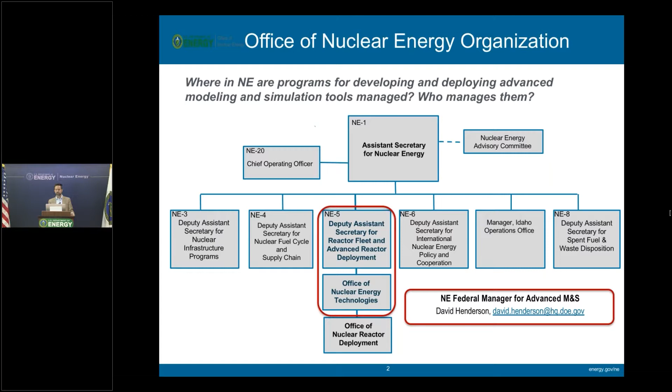So historically, and to the present, our modeling and simulation programs, there are two. One is the Energy Innovation Hub for modeling and simulation. You also hear that referred to as CASL. That's the consortium that runs that hub for the department. This was and is a program focused on light water reactor technologies. Then we also have the Nuclear Energy Advanced Modeling and Simulation program. That program has been focused on non-light water reactor technologies. So when I refer to advanced reactors, I'm typically referring to non-light water reactor technologies.

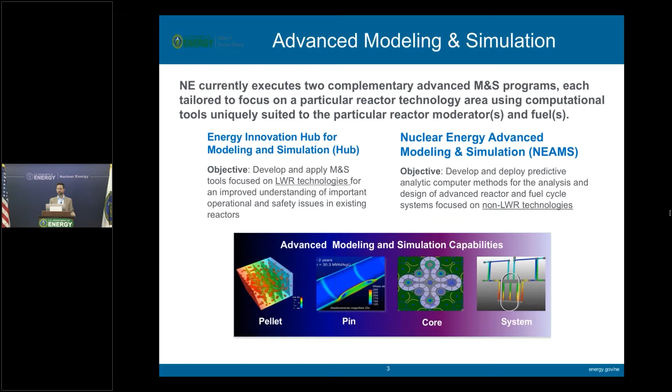I say that these programs have historically been separate because starting this next year in 2020, the hub program will go away. It's received what we expect to be its last year of funding in 2019. That will carry into 2020 when the 10-year period for the hub is to end in June of 2020. In preparation for that, we've been working for quite some time to look at the light water reactor scopes of work for modeling and simulation that really need to continue into the future. And so the two teams have worked well to identify that scope and fold it into the single program going forward, Nuclear Energy Advanced Modeling and Simulation. But that program in the future will include light water and non-light water reactor work.

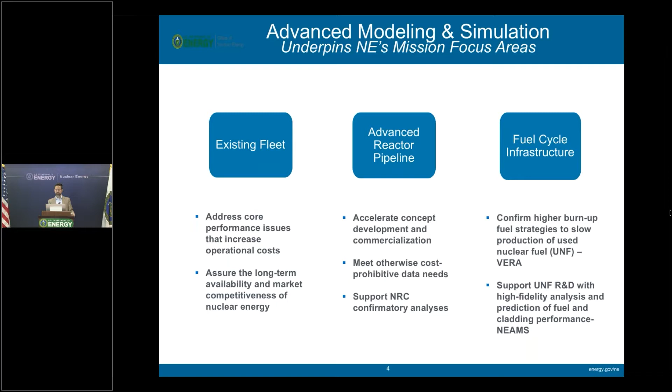So these are the three main areas of the Office of Nuclear Energy's mission that the modeling and simulation programs support: the existing fleet, advanced reactor pipeline, and fuel cycle infrastructure. And I'll go into at least the first two of these in more detail here next. So for the existing fleet, we're really looking at operational kinds of issues, ways that we can improve the operational performance, the economics, ultimately, of the existing fleet. So we're very interested in those problems that are of high interest to the industry, to utilities, to vendors especially. It focuses a lot on fuel and reactor core performance issues. You see some identified here, and solutions that we've been looking to address.

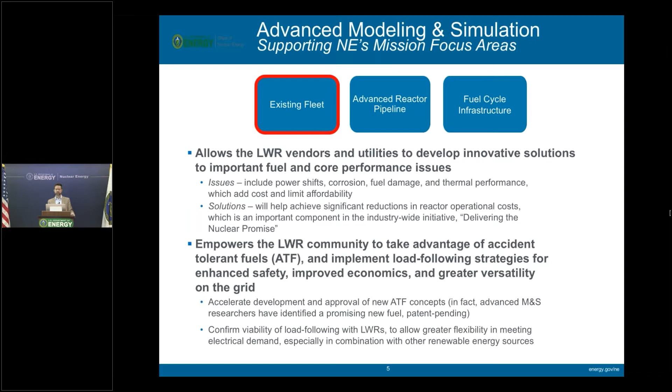We also have been working on accident tolerant fuels for quite some time. Both the advanced reactor NEAMS program and the hub have used the Bison modeling tool for fuel performance aspects. And so we will continue to do research in this area, especially in accident tolerant fuels. Some of these concepts are significantly different than the existing light water reactor fuel, and may need more modeling and simulation support, whereas for current fuels, the industry has very tried and true tools for licensing and performance kinds of issues. So we look to the industry to help guide us in where we should invest further there in the future.

On the advanced reactor side, we see a much larger role for advanced modeling and simulation. And when I say advanced modeling and simulation, I'm typically talking about multi-scale and multi-physics modeling. The reason being, there's much less infrastructure, both physical infrastructure and modeling and simulation history, to go on and to rely on as some of these advanced reactor technologies try to design, license, and ultimately build. So we see a critical role in accelerating the design and deployment of those reactors. In some cases, there are unique features of those reactors that if you were to use existing tools that are out there, you may not be able to examine in full detail all the aspects of your design, or as you go toward licensing, make use of the safety features of those designs. So we're really trying to reduce the time for licensing applications to the NRC and enhance the potential for successful commercialization.

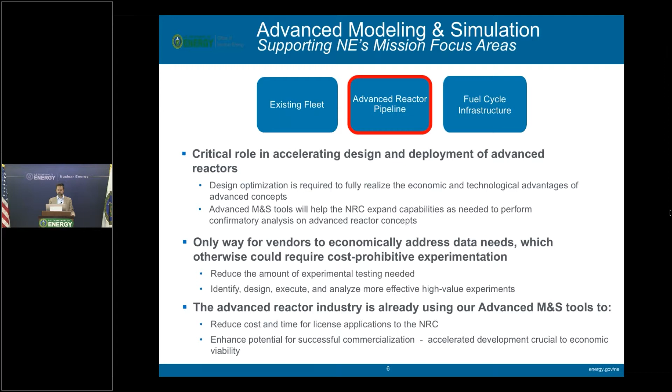I wanted to give a couple of examples, collections of modeling and simulation codes to really highlight for folks proposing. This is something that comes up quite frequently. We'd like to minimize the proliferation of additional codes and really try to focus work under these NEUP scopes into developing models that can be folded into these codes that already exist, or else we end up with too many animal names to even keep track of.

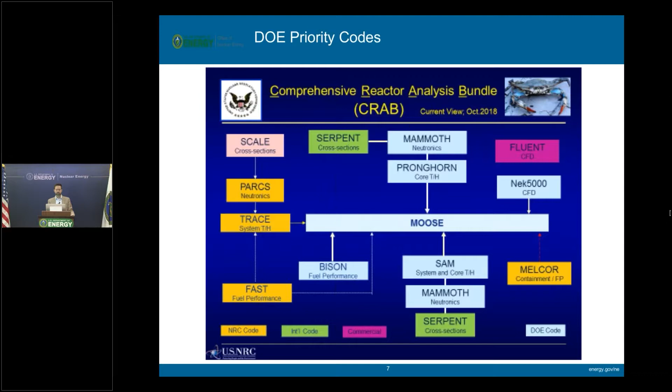Not all of these are fully developed. Obviously, that's a large part of what the program is working on, and we are prioritizing these codes because they're of high interest to the NRC, and they plan to use them. The ones in blue are the ones that we're actively developing within the nuclear energy modeling and simulation programs.

This is another list. This is not exclusive, but if you're proposing to use these codes or fold your models into these codes, that will definitely help us, as these are really the focus going forward, especially for advanced reactors. But some of them can be used for light water reactors as well.

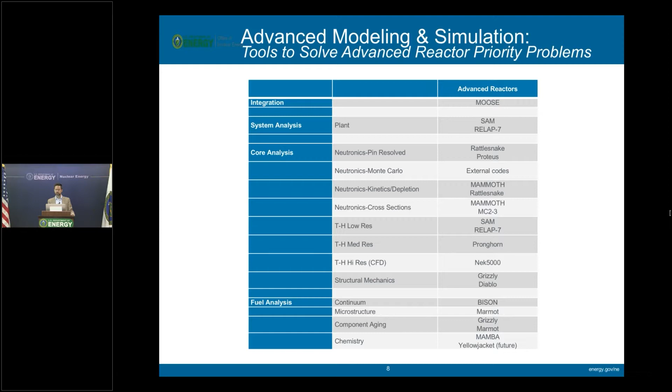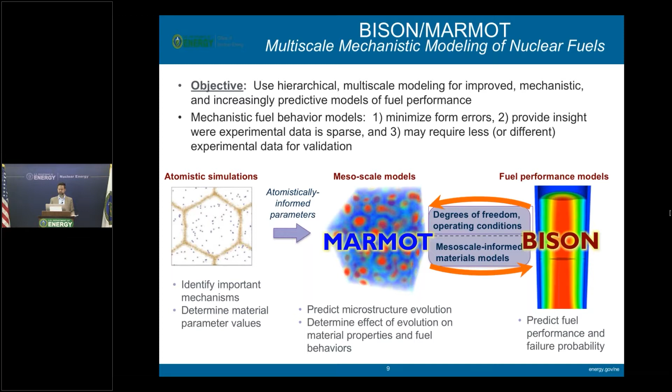So getting into the actual scopes in this CINR call. The first one is NEAMS-1, and this is seeking a generalized approach to multi-group cross sections. This is addressing the fact that to date, to run your core simulations, you'll need to generate multi-group cross-section libraries, but those are very specific to one particular point in time, one particular design, and if anything changes, those libraries may have to be regenerated anew. So we're really looking for a more flexible technique that doesn't require the regeneration of cross sections every time something changes. Think of inserting a plate or a baffle in a reactor, a generalized technique or methodology to be able to handle that on the fly.

At this point, I also wanted to note that as I go through these slides, these are not a complete rehash of what is in the scopes of work that are written in the call. So please pay attention to that. It's got much more detail. What I'm seeking to do here is highlight some specific things that we are looking to emphasize or avoid, as the case may be. I'll be folding these into any edits to the scope in the next week or so, where we may need to give some of this specificity.

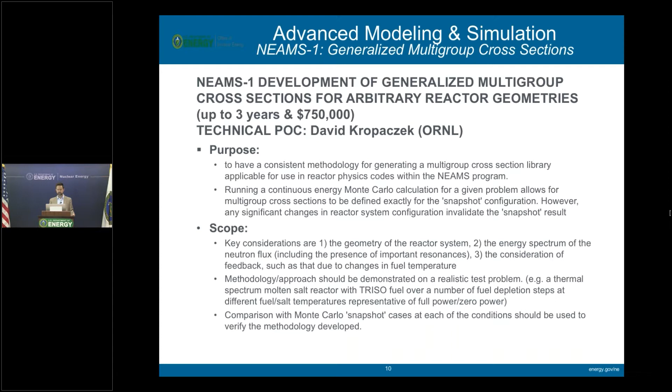So the second scope is NEAMS-2. This is near wall gas flow correlations in pebble beds. So this is the gas flow through the porous media. The approximation of that is central to the design and licensing of gas reactors. In particular, the flow near the wall and its interaction with the bypass flow is something that has not been modeled and validated at high resolution.

So really with this scope of work, we're looking for folks to develop a test to be able to model and capture the high resolution data for such gas flow near the wall. We're really looking for these experimental investigations to have high resolution and spatiotemporally resolved measurement techniques, so that we're getting really high quality data that we can use for these high fidelity simulations.

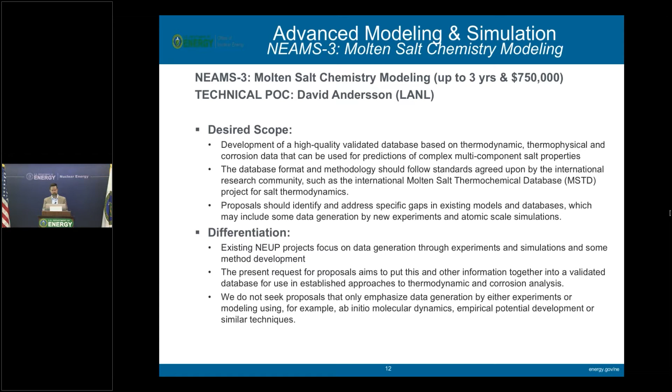Okay, so then we move into the MS-NEAMS area. We have, I believe, one scope of work in this area. This is on the SAM code, baseline development for that code. And there are two parts to this scope. One is multi-scale thermal fluid simulation. So we're looking for robust and accurate schemes for coupling the 1D system codes and 3D computational fluid dynamics codes at the fluid-to-fluid interface. There's a lot of loose coupling approaches in the literature. We're looking for more tightly coupled schemes.

This could also include the coupling schemes of conjugate heat transfer between 2D structure and 3D fluid flow. We are looking for direct comparison of existing or new data sets with simulations that use the NEAMS codes, specifically the SAM and Nek5000 codes. And we're not looking for pure CFD validation experiments, which we've done either in other scopes in the past or are doing elsewhere.

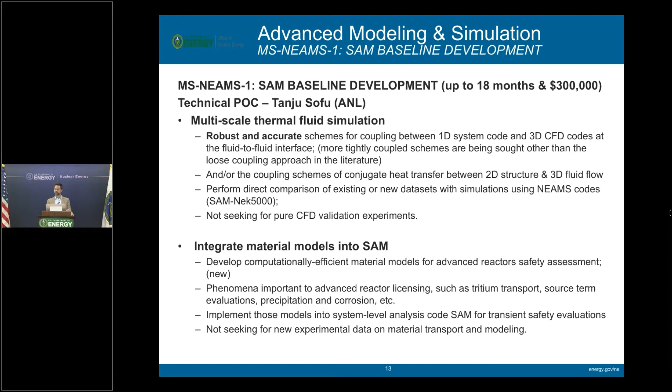The other part of this scope is to integrate material models into the SAM code. So developing computationally efficient material models for advanced reactors for use in safety assessment. Looking to integrate phenomena that are important to advanced reactor licensing, things like tritium transport, source term evaluation, and then looking for proposals that implement those models in the systems level code. We're not seeking new experimental data on material transport and modeling. So this is one of those instances where I'll put some of these specifics into the scope of work in the next edit, so do be watching for that.

All right, so as we get to the two IRP scopes that we have for modeling and simulation, I wanted to give a little bit of an overview of what we're trying to achieve here. This may or may not be different. It's at least different for us, but we really want to try to encourage university involvement in the program and the execution of the program at a more integrated level, more tightly coupled, involved in the discussions that we have about what the scope should be, what the areas of emphasis should be, and to help execute that as well.

So these are not highly specific scopes of work. We're really after identification of strong teams that can work in this area, but can also have the ability to adjust over these 3-year periods as the emphasis may change within the program. But we would be looking for the participants on these IRPs to really function as a part of the program, to be representing the program in meetings outside of our internal meetings, to be describing and defending the scope that the program is pursuing.

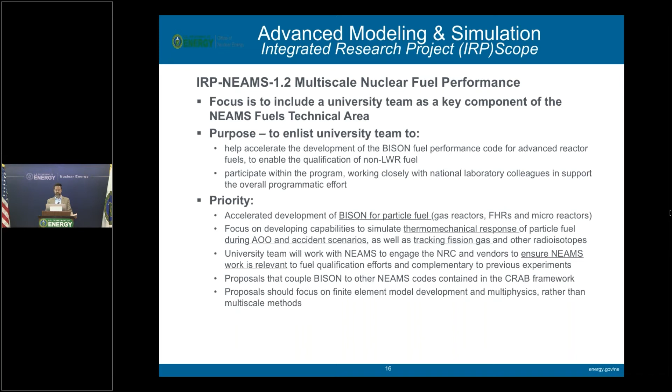This group would need to engage with not only the NEAMS program, but also NRC and the nuclear industry to make sure that the work that we're doing elsewhere in the program and the work that's being done under this scope is relevant to the industry. So this work done under this scope, while it should be focused on the BISON code and incorporating models into the BISON code, it should also be done with the intention to integrate the BISON code with our multi-physics approach that we have in the program, and that is also identified in that CRAB framework, which is the NRC slide I referred to earlier.

Okay, so those were the scopes that are more specific to the NEAMS program. These next two, while I am kind of the caretaker for this area, they're not specific to modeling and simulation, although that's where you'd use a lot of nuclear data and benchmark evaluations. But I am working with the other parts of the Office of Nuclear Energy as we receive proposals to make sure that the reactor type that one of these might be useful to is a priority for those areas. So we have two scopes in this area. The first one has to do with benchmarking. This is the MS-NE-1 scope.

So a little bit of background here on these two international benchmarks, the International Criticality Safety Benchmark Evaluation Project and the International Reactor Physics Evaluation Project. These are both OECD NEA international activities, long-running, focused on updating and publishing handbooks that support the characterization of reactor core methods, neutronics components, multiphysics measurements, validation of the nuclear data, and are useful in reactor and criticality safety. This has been a long-running scope, I think, for at least a couple of years previous, and continues into this year. So hopefully you're fairly familiar with these benchmark projects.

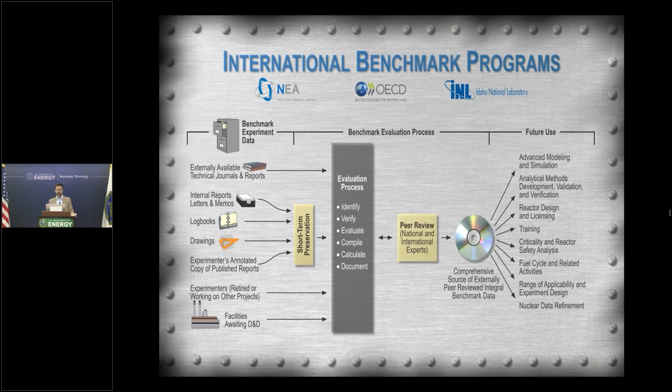I really want to encourage you to take a look at other projects that have been awarded, whether it's within the CINR framework or outside. Please make a case when you propose in both of these areas as to what the need or the gap is. Make it very clear what this benchmark, in the case of benchmarks, will be most helpful for, so we can really evaluate the impact that your proposal would bring.

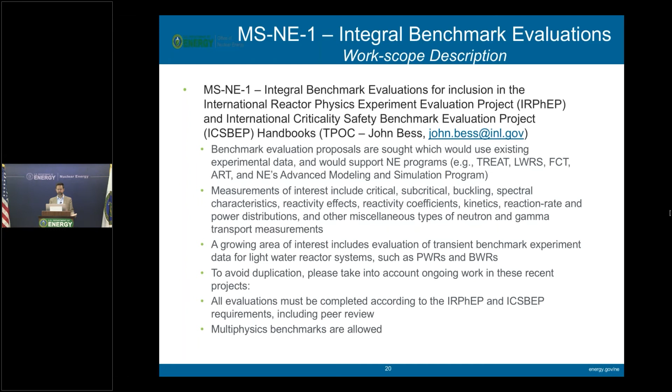The second scope area is nuclear data. So again, this is the same scope of work that we had last year. So please look at the awards that either have been or will be announced soon, as the case may be, within the CINR framework. But also there is an agency-wide activity that is run by the Office of Science, or led by the Office of Science. The Office of Nuclear Energy and NNSA also participate in those calls.

Their call includes both laboratories and universities. We only participate in the laboratory side of that call because we have this scope of work under the CINR. So here we've recognized over time that as libraries get updated, databases get updated, in improving some areas of that database, it may create problems in others. So also there are just in some areas uncertainties that are important for some of these advanced reactor concepts.

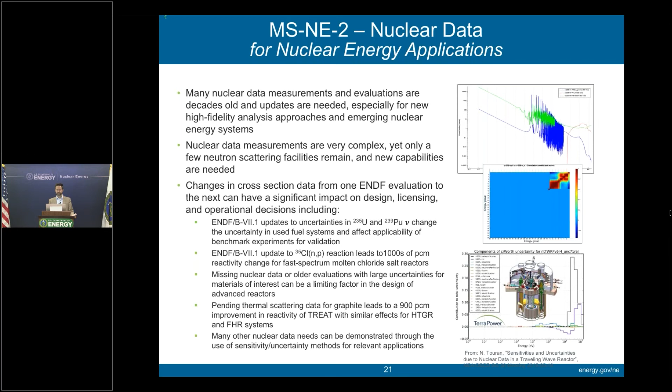And so as you propose work in this area, please identify what those gaps are clearly and what the impact on reactor operation or safety or licensing would be. So this is, as I said, the same scope of work as last year. When I put this scope out, I didn't have a technical point of contact listed here. That'll be Brad Rearden, who was also the technical point of contact last year. So just pay attention to what's already been awarded, and please highlight the impact of the nuclear data that you're looking to improve or supplement.

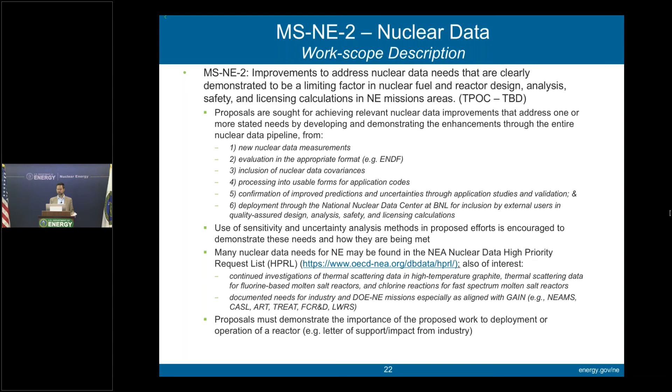There was something else I was going to say on this slide. Yesterday there was a scope of work under the MSR and reactor concepts. And so I wanted to clarify how this nuclear data work relates to the work under that scope. So here we're talking about actual generation or analysis and improvement of nuclear data. In that other scope of work under the reactor concepts area, that is looking at capability development or capability enhancement for nuclear data purposes. So that other scope is about capability. This scope is about the actual nuclear data. So I know a question came up on that yesterday, so I wanted to clarify that as well. So that is my last slide, and I'll be happy to take questions.

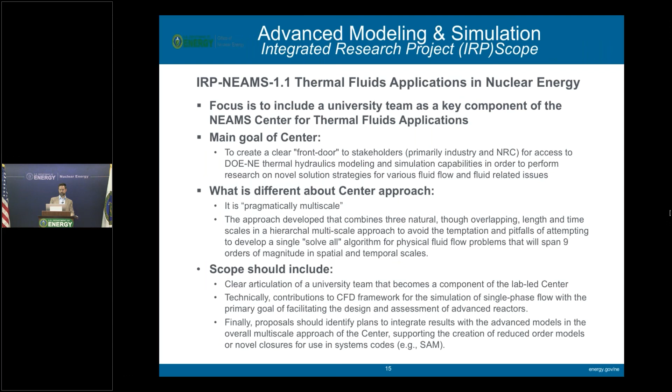Okay. Is NEAMS-2 mainly an experimental work, or are you also looking at wall functions, modeling, and experimental data analytics? Okay, I'm sorry, can you repeat that again? Is NEAMS-2 mainly an experimental work, or are you also looking at wall functions, modeling, and experimental data analytics? Sorry. Yeah, I think the answer is that it's the latter. It's both the experimentation and getting experimental data and folding that into the models. So not just one or the other. It's going to need to involve both.